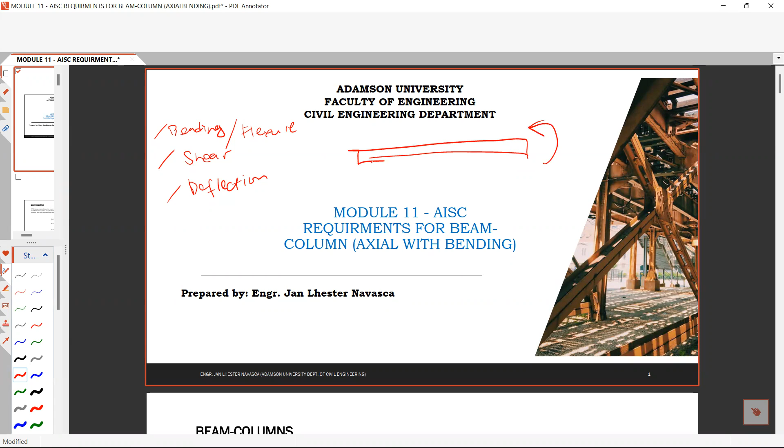Again, the steel beams are the horizontal members that are susceptible for bending, or basically pure bending lang siya. Ito yung steel beam natin, pure bending lang siya. Then under the bending and flexure, we have the three limit states: yielding, lateral torsional buckling, and flange local buckling.

And under shear, we are considering two different scenarios. Number one is when you don't have web stiffeners, or you have stiffeners but your A over H is greater than 3. Number two is when you have stiffeners or web stiffeners and your A over H is less than 3. So that is the shear requirement.

And under the deflection requirement, you have different criteria. Deflection requirement is under the elastic analysis - what is your deflection of your steel beams? You need to control your deflection to control the damage of non-structural components connected to your steel beams. Kung if you have a glass below your steel beams, if you have a large deflection, maybe that non-structural component, the glass cladding, will break. So this will be the criteria in designing your steel beam when you have pure bending like this one.

The question is, what if there is an existence of an axial load? So mainly for a column, we are anticipating a pure axial compression or a pure axial tension. And for beams, we are anticipating a pure bending - only bending. I call this one pure because very large yung difference between almost zero yung bending in a column and almost zero yung axial in the beams.

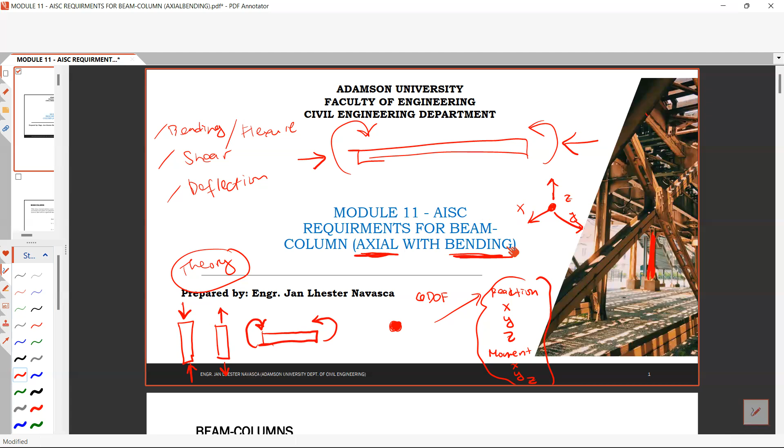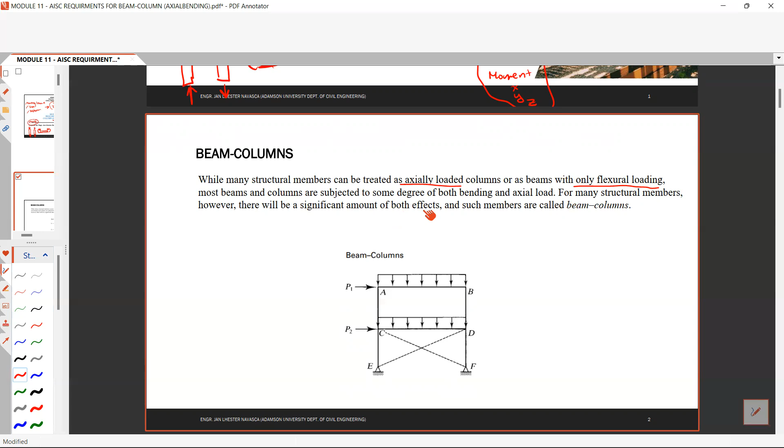So beams and columns are, let's say this one - while many structural members can be treated as axially loaded columns, that's like what I said, that our column is treated as axially loaded, only pure axial compression or pure axial tension, and beams only for pure bending, pure flexural loading. However, most beams and columns are subjected to some degree of both bending and axial load. So for many structural members, there will be a significant amount of both effects, and such members are called beam column, or the interaction of our axial with bending.

Okay, so another example kung bakit kayo magkakaroon ng axial with bending interaction is when you don't have a perfectly constructed building. Okay, don't have a perfectly constructed building.

So for example, based on the drawing, your reinforced concrete, let's say, have a distance of let's say 250, or let's say this one is 400. But in real life, ang nagawa is let's say 245 by 395.

Okay, so there is an error. So therefore, your column, let's say this one is your column, is not placed on the center of your column. So meron siyang eccentricity. What you call this one as an eccentricity. There is an eccentricity to the load and to the center of gravity of your section.

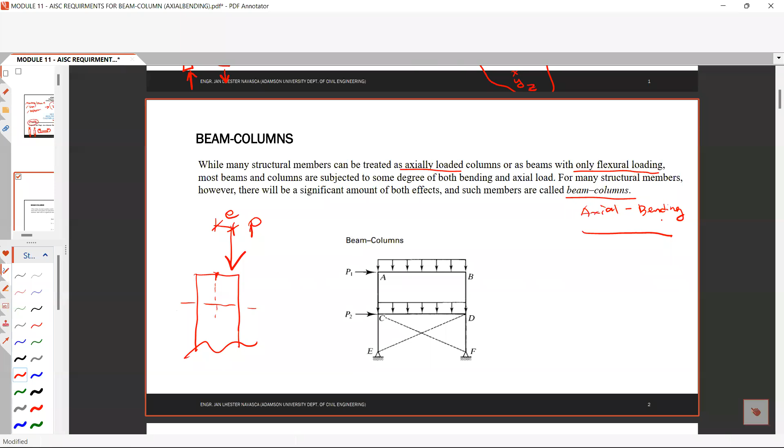Okay, so at this case, you have an axial with bending interaction. Okay, so there is a provisions in AISC how to deal with this kind of cases when you have an interaction of axial and bending, or what they call as beam columns.

So let us recall ano yung napag-aralan natin in the prelims and midterms when designing compression members, tension members, and steel beams. Okay, so let us recall that the required strength should be less than or equal to the available strength, or what we call this one as your demand load should be less than or equal to your required strength or your capacity.

Sorry, not required strength, the capacity. Okay, so your demand load shall be less than or equal to your capacity, or they call this one the required strength shall be less than or equal to the available strength. So in order to satisfy or to be safe in your steel members or your structural members.

So in tension members in LRFD, we are comparing the T sub U to phi sub T Tn, right? Whereas your phi sub T is the resistance factor in tension. And for ASD, you have T sub A less than or equal to T sub n divided by the factor of safety omega in tension. What you have this subscript T in tension.

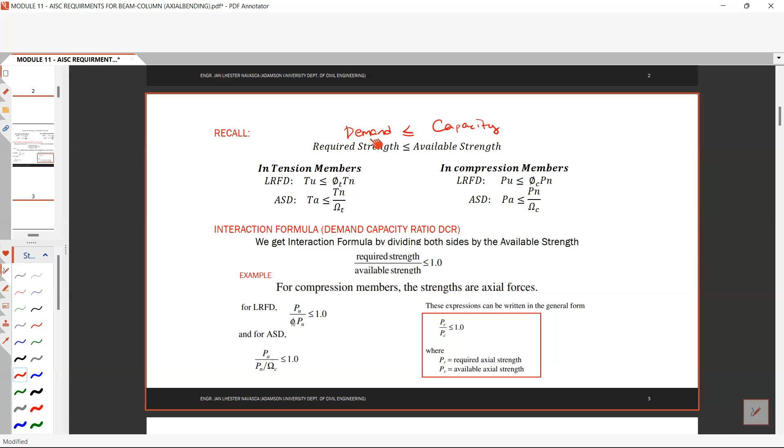So this is our working equation when we're dealing with how to check the adequacy of our steel members. Then the interaction equation or the demand capacity ratio, as you all know right now, what is the DCR, is basically the ratio of your demand to the capacity. So we get the interaction formula by dividing these both sides by the available strength.

So therefore, the required strength and the available strength, or we call this one as the demand capacity ratio, or demand divided by the capacity, shall be always less than 1.0, in order to satisfy

the adequacy or the safety of our steel members. Okay, so masasabi natin na safe yung ating members when our demand capacity ratio is less than 1.0, right?

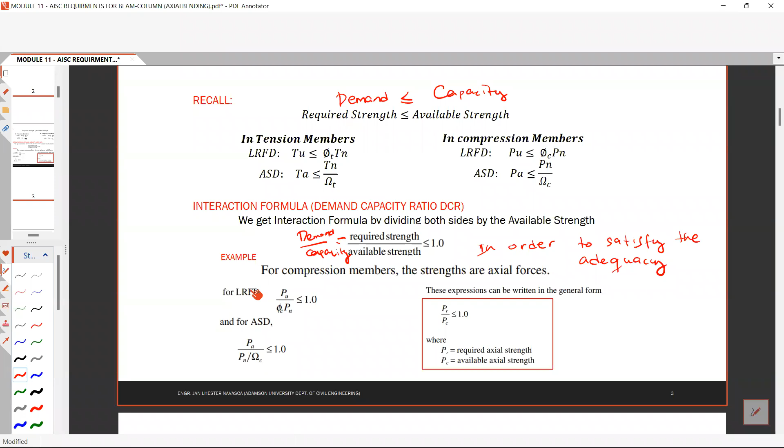So for example, in compression members, the strengths are based on axial forces in kips or in kilonewtons. So let's say in LRFD, your P sub U divided by phi sub C Pn shall be less than or equal to 1.0. And for ASD, this P sub A divided by Pn over omega C is less than or equal to 1.0. So basically, just divide this one and you have 1.0.

Okay, this expression can be written in the general form that P sub R over P sub C, where P sub R is the required axial strength and P sub C is the available axial strength. So basically the same as our demand capacity ratio. The only thing that changes is the subscript. The AISC uses R and C. R is for the required strength, and C is for the capacity or the available strength.

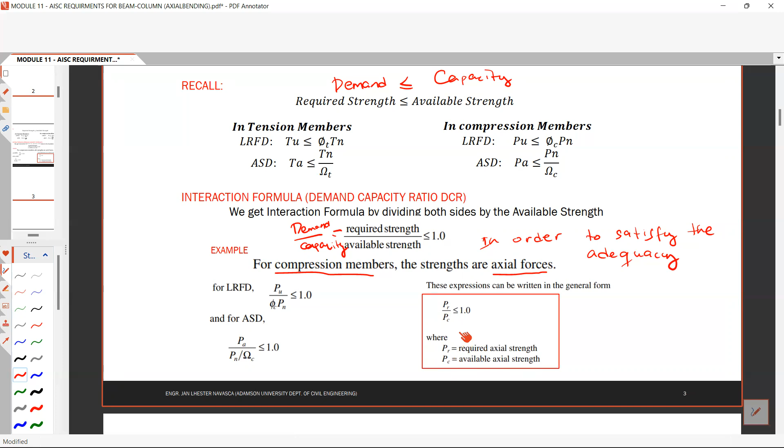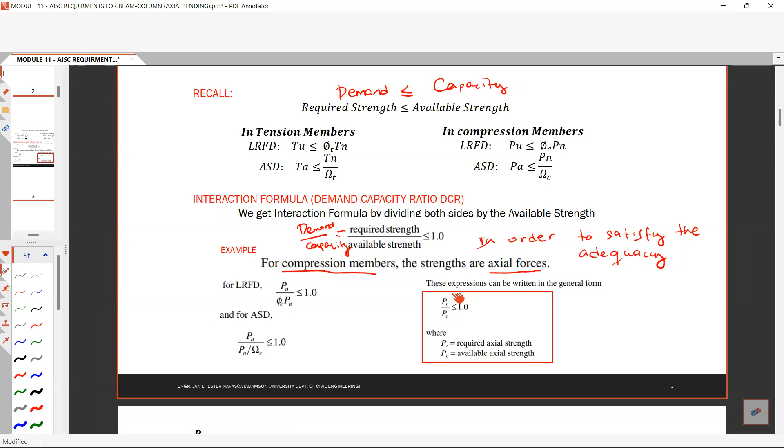Okay, so this one can be generalized to these equations: PR over PC, where P sub R is the required strength and PC is the available strength. Then we call this one as the interaction formula for compression.

Okay, now considering moment, what if considering moment, so just change P to M for moment, just MR over MC shall be less than or equal to 1.0. We call this one as the interaction formula for bending only. So this way is the interaction formula for compression and the interaction formula for bending. Okay, so now considering this combined axial and moment.

Considering this combined axial and moment, the sum of the interaction formula for bending and the interaction formula for compression shall always be less than or equal to 1.0 if you are considering this combined axial moment. We call this the interaction formula for axial with bending on a single axis only.

Now let us consider both axes. What if we have this section with bending in Y and bending in X? The interaction formula for both axis bending is PR over PC plus MR over MC on the x-axis plus MR over MC on the y-axis shall be less than or equal to 1.0. This is the interaction formula for axial with bending on both axes.

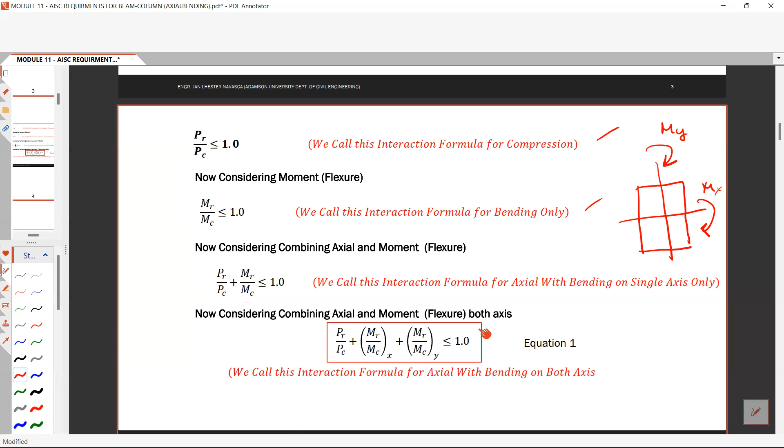So on STAAD, if you try to solve structural analysis of beams and structural analysis of our project, you can see that in the output of the structural analysis, at every joint you have three moments: MY, MX, and MZ. These three moments are the moments in both axes, and the other one is for torsion, along this grid.

Later on, when you are dealing with the structural analysis of the whole structure, you can see that you have this bending in both axes. This bending in both axes uses the interaction formula considering bending in both axes.

So PR over PC, plus MR over MC on the x-axis, plus MR over MC on the y-axis shall be less than or equal to 1.0. This will be our equation 1. This equation 1 is the basis of the AISC formulas, the interaction formula basis of the AISC.

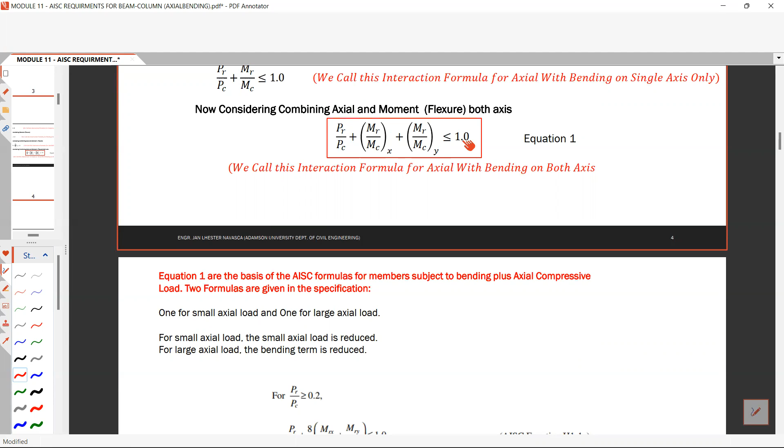They just modify this interaction formula considering different cases. Case number 1 is for small axial load, and case number 2 is for large axial load. For small axial load, the axial load term is reduced, as you can see. And for large axial load, the bending term is reduced. This is for large axial load, when axial is a compressive force. And this one is for small axial load.

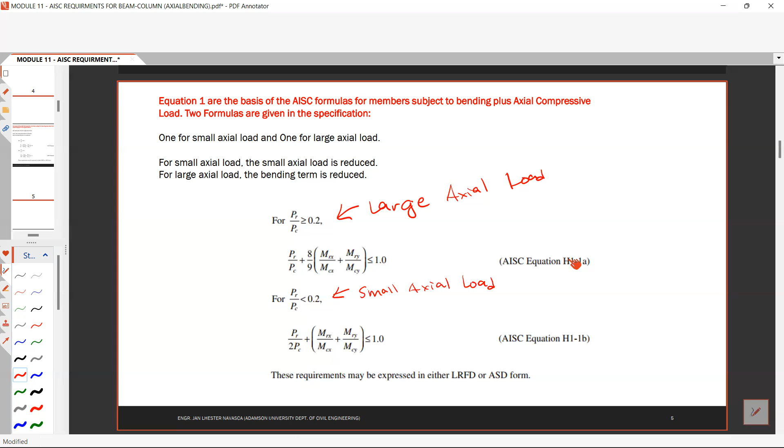If we compare this AISC equation to our basic interaction equation, the constant or coefficient of each term there is 1.0. This one is 1.0, this one is also 1.0. So the coefficients of each term is 1.0.

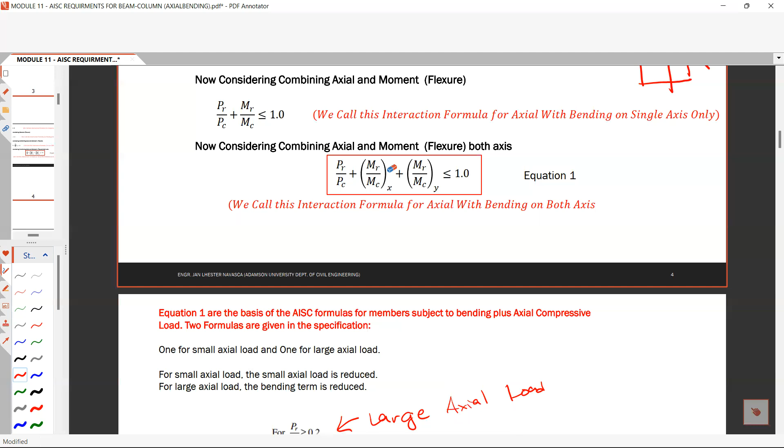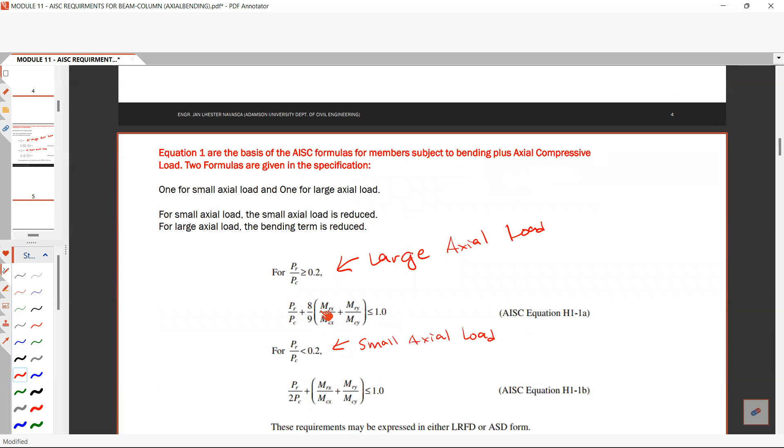But the AISC provides a factor or coefficient or constant that will modify the axial or bending term depending on the case. When you have a large axial load, the bending term is reduced, so as you can see, you have a factor of 8/9 applied to the bending in both axes. 8/9 is less than 1.0, equal to about 88.88%.

For large axial load, the bending term is reduced, and for small axial load, the axial load term is reduced by a modifier of 1/2. This one remains 1.0, just like this one remains 1.0, but this one has a factor of 8/9.

So this will be the AISC equation H1-1a for large axial load, meaning the interaction equation for axial that is greater than 0.2, or the DCR that is greater than 0.2. When your DCR, or PR over PC, is less than 0.2, you have this other equation. So you can tell if your beam is satisfying the strength requirement or not because of this AISC interaction equation.

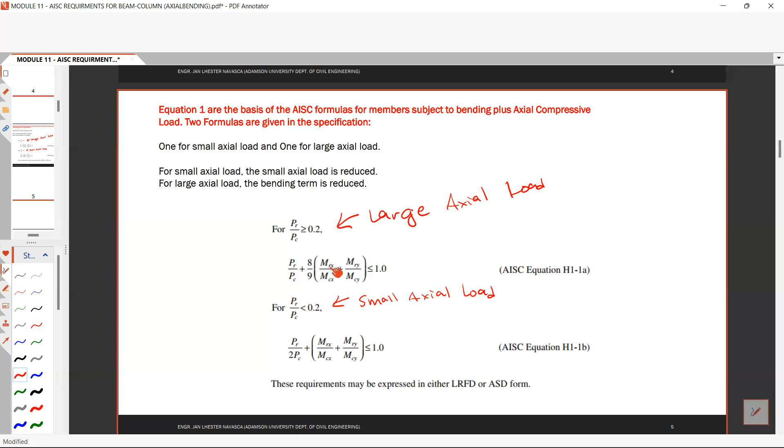This case is for doubly and singly symmetric members subjected to flexure and axial force. Doubly and singly symmetric meaning symmetric in shape about both axes. So doubly symmetric shapes are I-beams, and also hollow sections, meaning you have symmetry on the X axis and symmetry on the Y axis.

And for singly symmetric members, this is for C shapes, for WT or T shapes, and L shapes, just like this one. So this case is for doubly symmetric, and this is for singly symmetric cases.

So PR over PC greater than 0.2, you have this interaction equation. And for PR over PC that is less than 0.2, this is your interaction equation.

PR is the required axial strength determined in accordance with Chapter C using the LRFD or ASD load combination. This is the demand. All the numerators are from the demand, and all the denominators come from the capacity. Take note of this so you don't get confused.

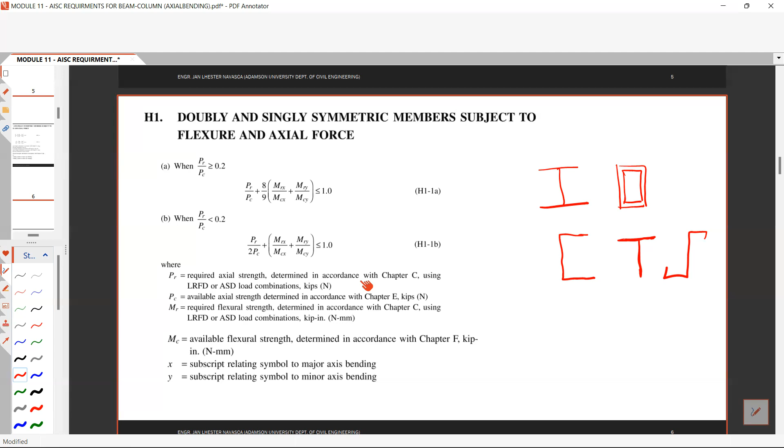So that is our interaction equation for doubly and singly symmetric members. If you are dealing with LRFD demand, you use LRFD capacity. If you're dealing with ASD demand or ASD load combination, you need to use the ASD design capacity.

So expanding the equation for LRFD and ASD: for LRFD, if PU over phi sub C PN is greater than 0.2, you use this equation. If PU over phi sub C PN is less than 0.2, you use this other equation. For ASD, you have this equation.

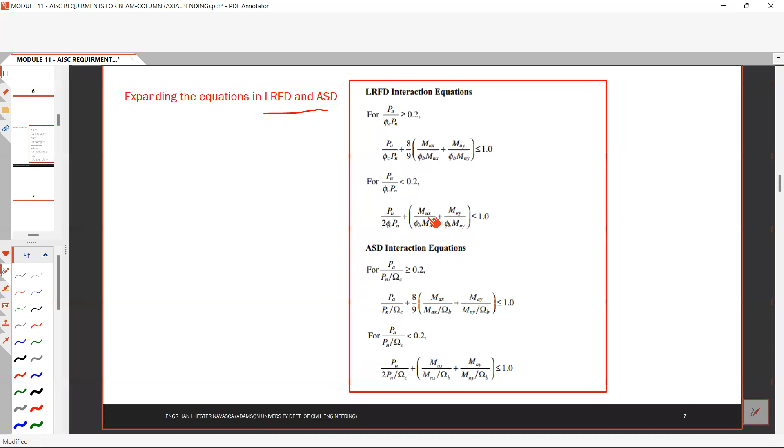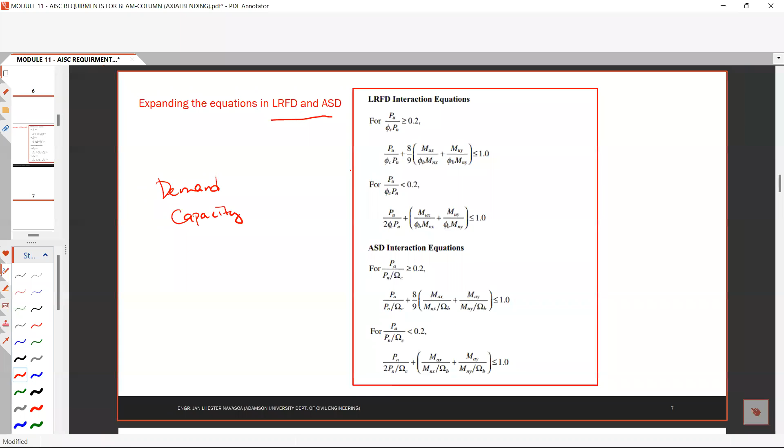Don't worry about this one. Just remember what is your demand and what is your capacity, and you're good to go with these interaction equations. So let's try to solve problems regarding these interaction equations of axial and bending.

Example problem 1: determine whether the given members satisfy the appropriate AISC interaction equation. Do not consider moment amplification. The loads are 50% dead load and 50% live load. Bending is about the x-axis and the steel is ASTM A992 with Fy equal to 50 KSI. Let's try using LRFD and using ASD.

Let us determine if this W12 by 106 satisfies the capacity when you have an existing axial compression and existing bending.

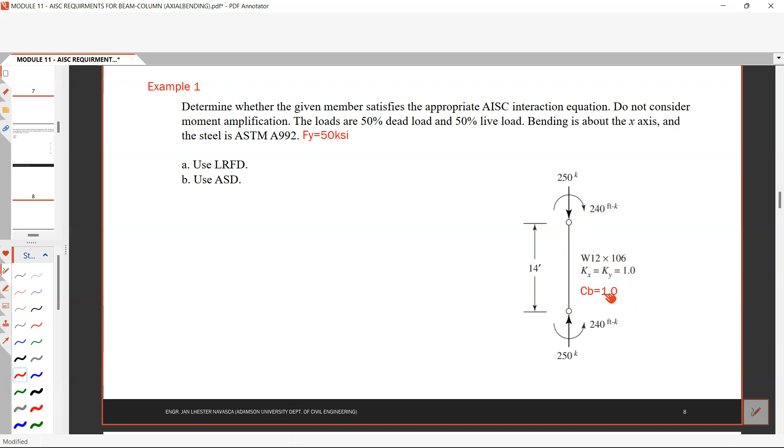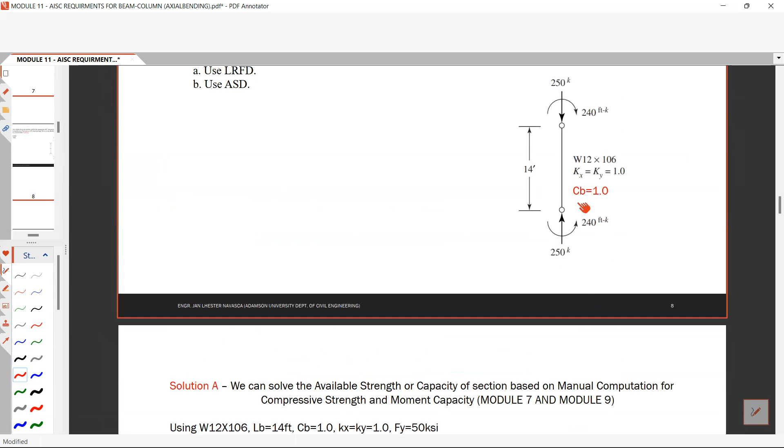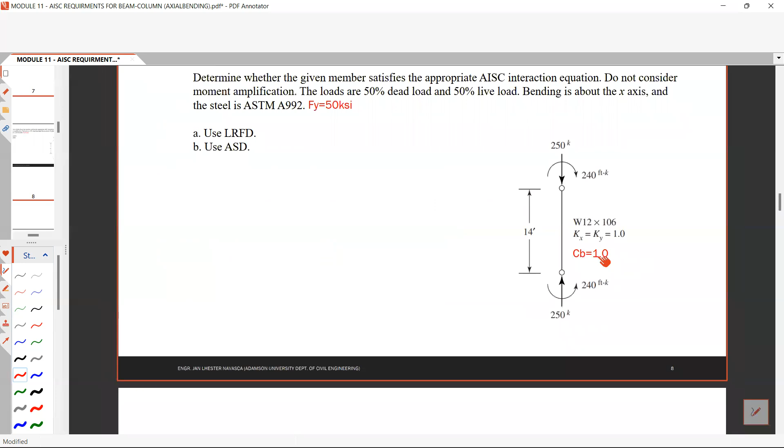For this problem we have two solutions. Solution A is to solve the available strength or capacity of the section based on manual computation for compressive strength and moment capacity - you can check Module 7 and Module 9. Module 7 is the AISC requirements for designing compression members or columns, and Module 9 is the AISC requirements for flexure of beams.

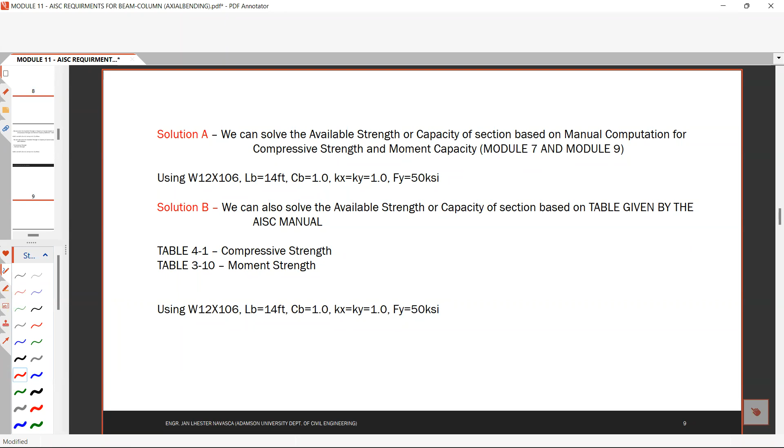So using W12 by 106, LB which is 14 feet, the total unbraced length is 14 feet, your Cb is 1.0, your Kx, Ky is 1.0, and your Fy is 50 KSI. Then we have Solution B: we can also solve this available strength or capacity based on the table given by the AISC manual. Table 4-1 is for compressive strength and Table 3-10 is for moment strength, using the same given parameters.

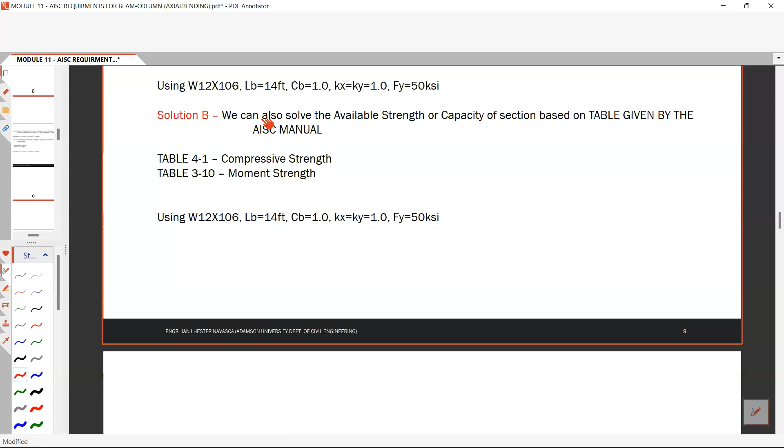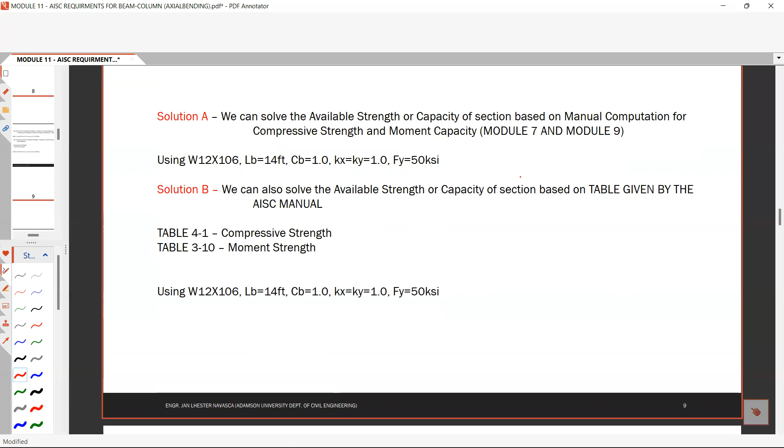Let's try to solve Solution B. For Solution A, you already know how to solve for the capacity based on Module 7 and Module 9 - check the slenderness for columns, and for the beams check the yielding, LTB, and FLB. That's Solution A. But for Solution B, which I'm showing now, you just need to check the table given by the AISC manual.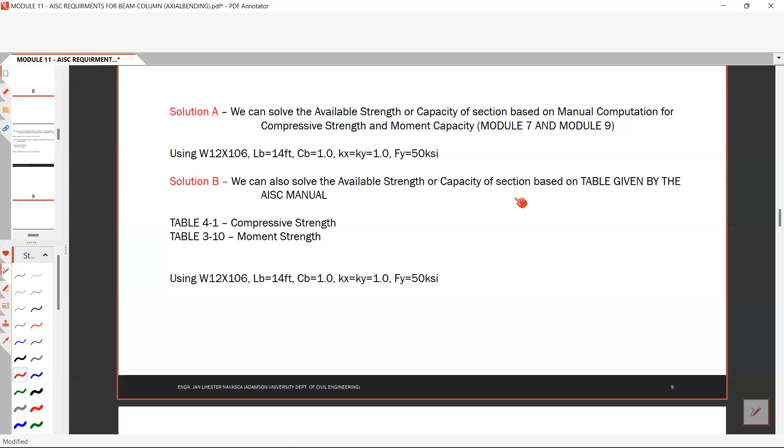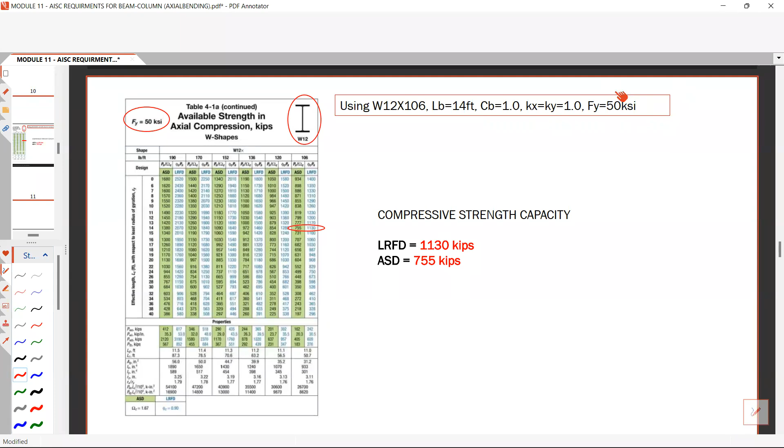Let us first solve the available strength and capacity using the W12 by 106 with Kx, Ky that is 1.0 and Fy that is 50 KSI. If you recall, I've already shown the class the table where you can see the capacity of your column - no need to solve.

Your unbraced length is 14 feet. Your effective length LE is equal to K times L, so that is 1.0 times 14, which is 14 feet. So you need to check the effective length of 14 feet. Check this W12, check this Fy 50 KSI.

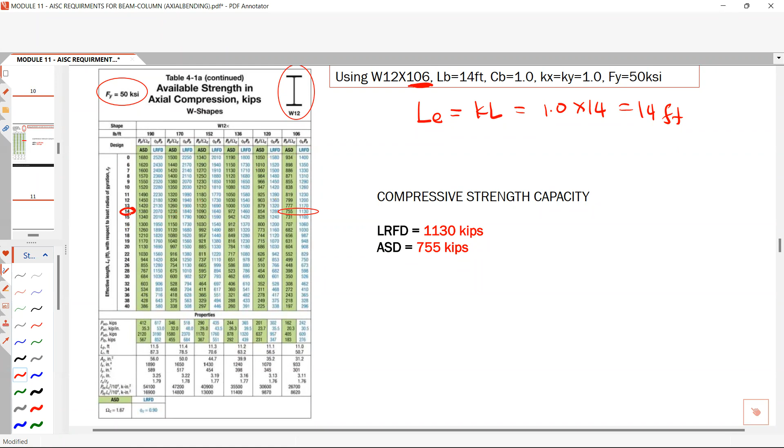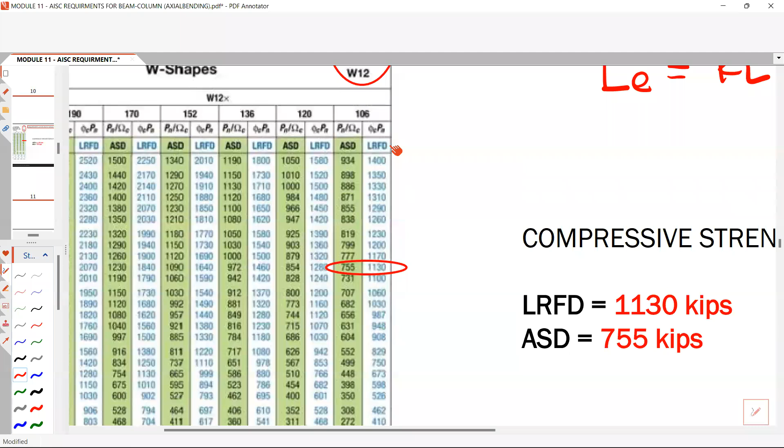Then check the unit weight of your steel section, that is 106 pounds per foot. So with 14 feet effective length and 106 pounds per foot, therefore you have this capacity. Zooming in, you have 755 kips capacity in ASD and 1130 kips capacity in LRFD. So this is the compressive strength capacity.

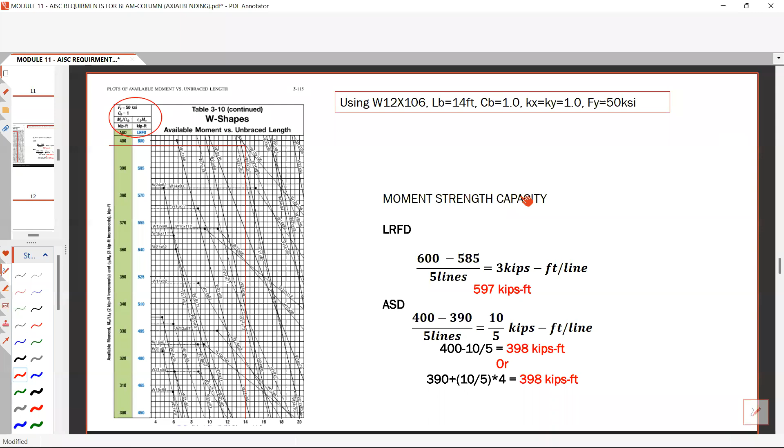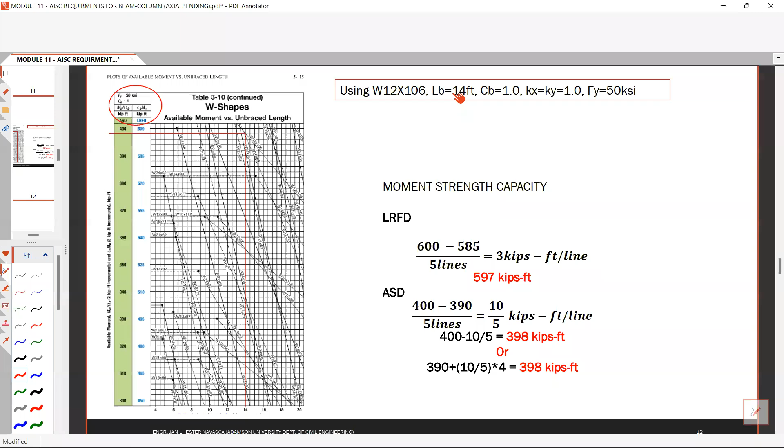Then solving for the moment strength capacity based on the table - no need to check that manually. You can use Solution B by utilizing this table. Again, using the same parameters: W12 by 106, LB that is 14 feet with Cb that is 1.0, and your Fy is 50 KSI. So let us check: Fy 50, Cb that is 1.

We need to find W12 by 106 in this graph. So where is our W12 by 106? Our W12 by 106 is given by this graph - if you can see, this one. This is the moment strength of W12 by 106.

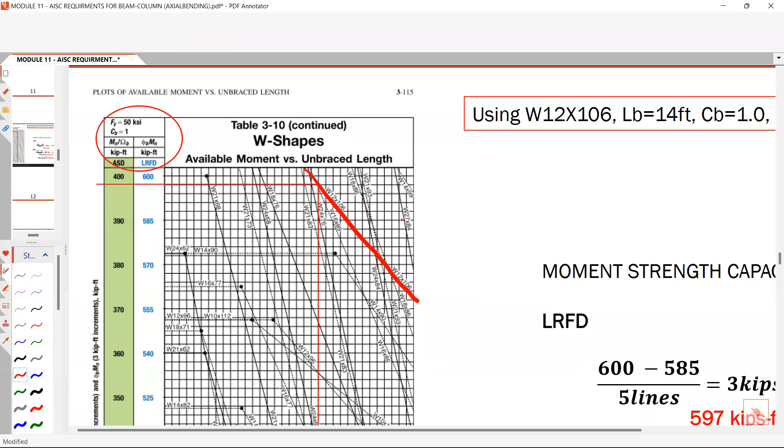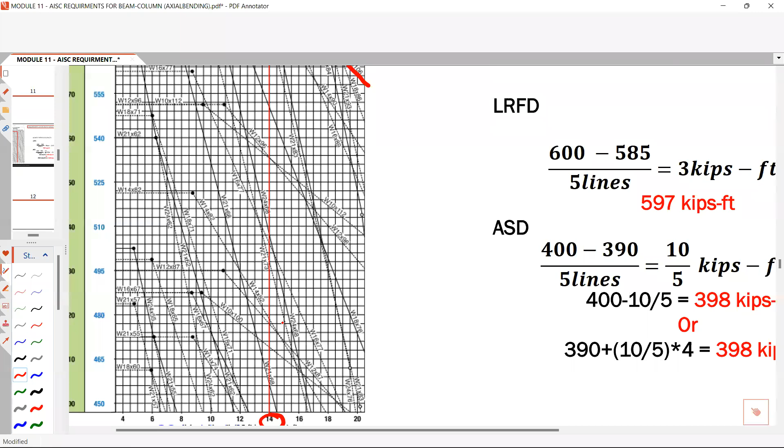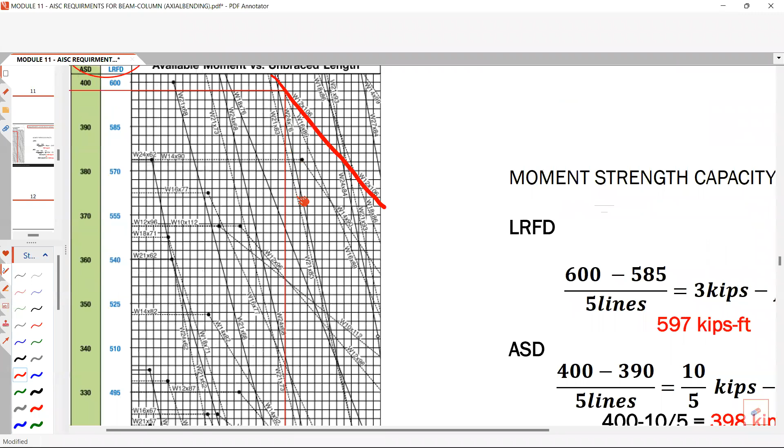So for the strength of W12 by 106, let us find our LB. Our LB is 14 feet, our unbraced length is 14 feet. Therefore we need to find the intersection of this 14 feet and this graph, projecting the vertical line for 14 feet unbraced length. The intersection of the unbraced length and this capacity graph is this one - it lands on this line.

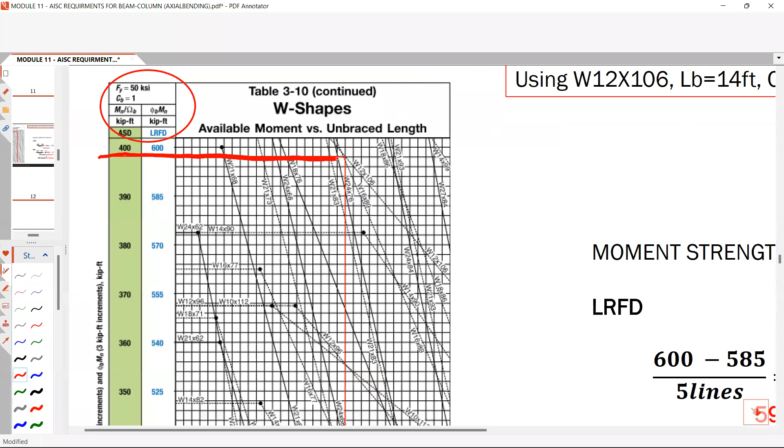Okay, so basically we just need to find the coordinates of this point in ASD and LRFD. So how do we solve for that?

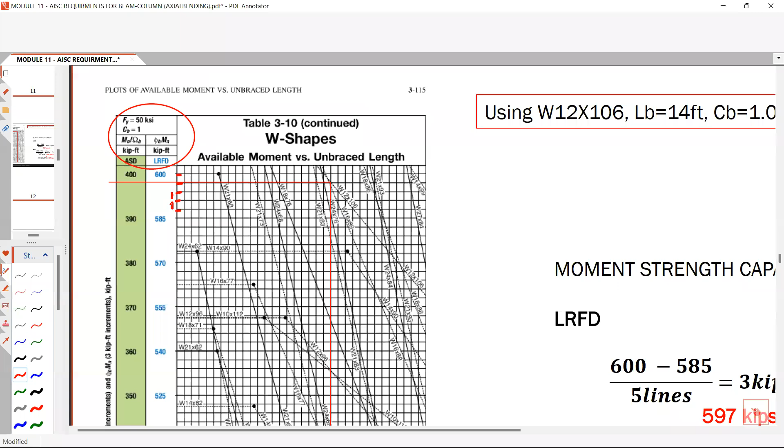For LRFD, just get the maximum and minimum of the given data and divide it by the number of lines. So how many lines between 600 to 585? We have 1, 2, 3, 4, 5, or 5 spaces. So meaning every line, you have 600 minus 585 divided by 5, that gives you 3 kips per line. So that is the scale or the unit per line.

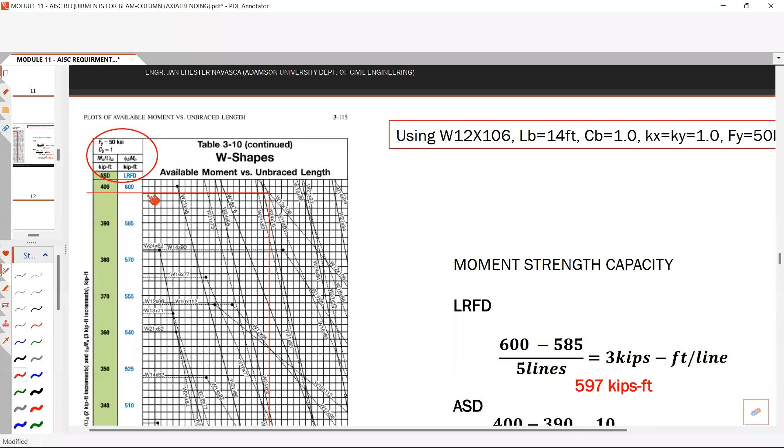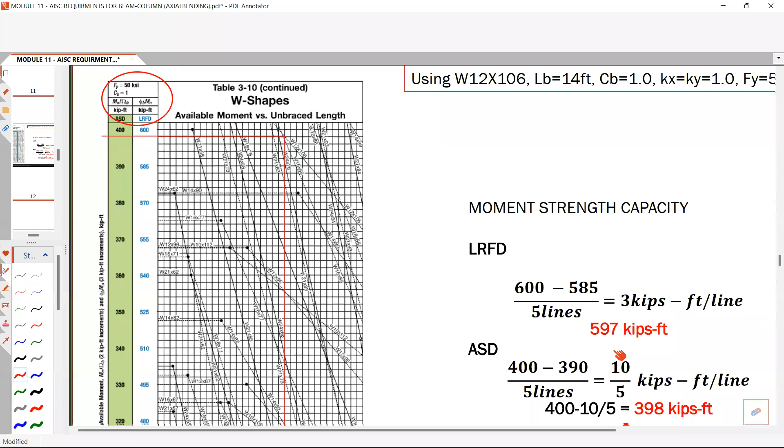And for ASD, 400 minus 390 divided by 5 lines, you have 10 over 5 kips per line.

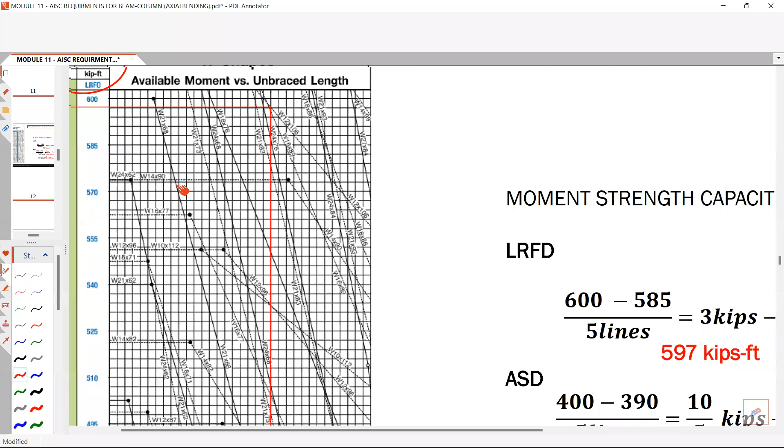Okay, so let us try this one. So how many lines? 585 plus 3 plus 3 plus 3 plus 3, or basically 600 minus 3. So therefore you have 597 kips feet.

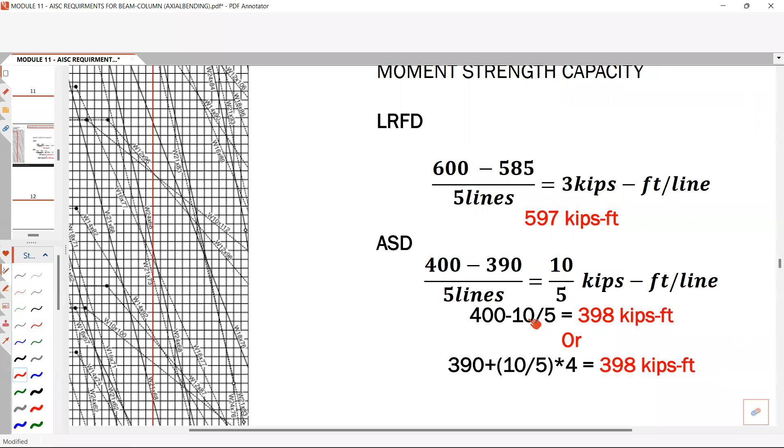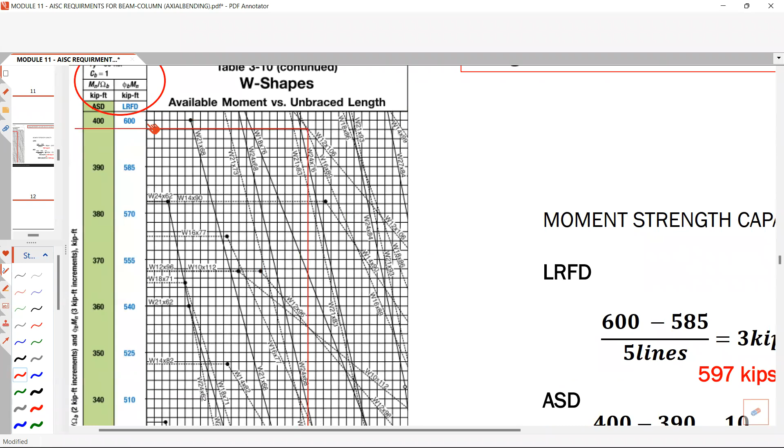Okay, then for ASD, how many lines? Maybe you can start from 390. So 390, 1, 2, 3, 4, that's 4 times 10 over 5. So 390 plus 4 times 10 over 5 gives you 398. Or maybe 400 minus 1 line, you have 1 line below, giving 398 kips feet.

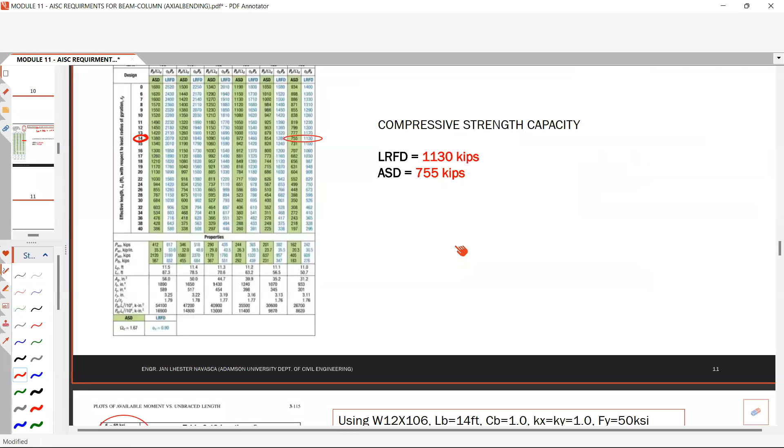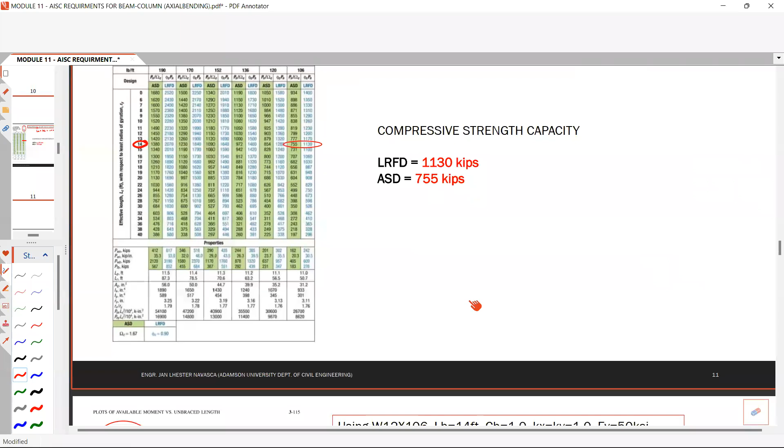So therefore, the compressive strength capacity in LRFD is 1130, and the moment strength capacity in LRFD is 597. And compressive strength capacity in ASD is 755, and the moment strength capacity in ASD is 398.

Okay, so let's get that one later. Let's just take it for now.

Then for the required strength and demand. According to the problem, we have 50% dead load and 50% live load. This is the total. So this 250 comes from 50% dead load and 50% live load, meaning this 250 kips force comes from 125 kips dead load and 125 kips live load. And this 240 moment comes from 120 dead load and 120 live load.

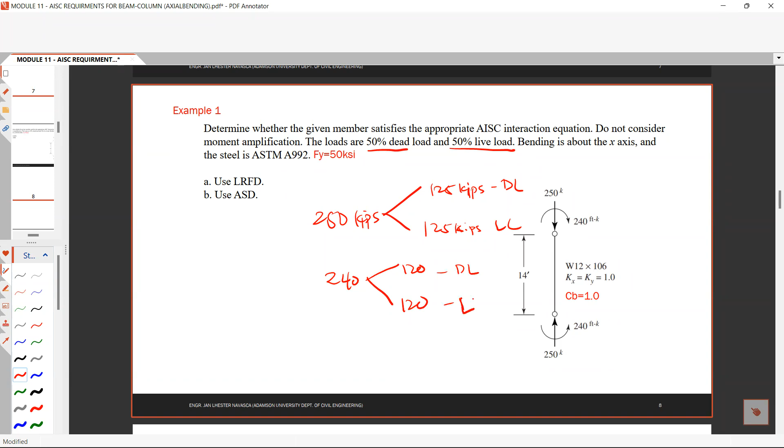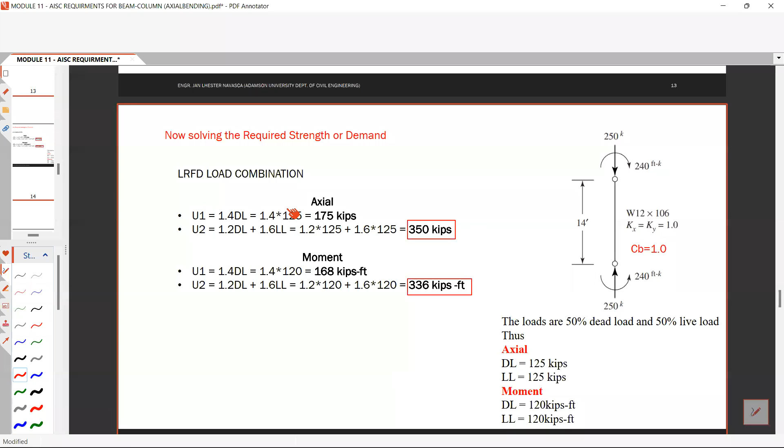Using the LRFD load combinations, you need to check U1 or U2 since you only have dead load and live load. For dead load, 1.4 dead load gives you 175 kips, or 1.4 times 125. Then for U2, 1.2 times dead load plus 1.6 times live load gives you 350 kips. So comparing U1 and U2, the required strength in axial under LRFD is 350 kips.

Then for moment, the two load combinations are 1.4 dead load, and 1.2, 1.6 live load. Using dead load 120 and live load 120, you get 1.2 times 120 plus 1.6 times 120, which is 336 kips feet. So this 336 kips feet is the required strength or demand moment under LRFD.

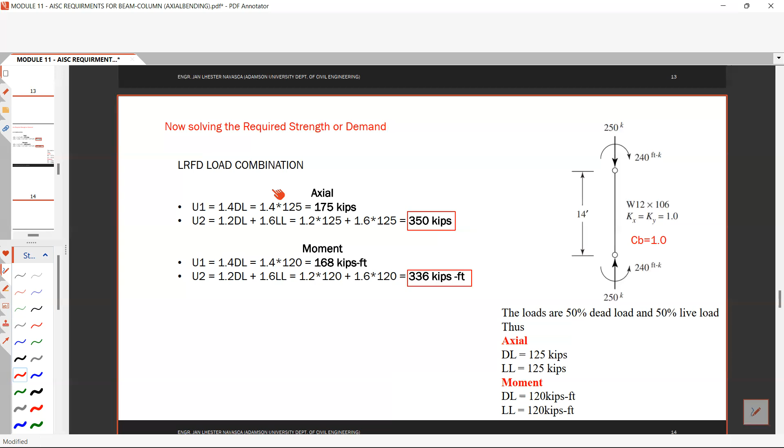Okay, so for ASD, you just basically use dead load plus live load only. Dead load plus live load is 250 kips. Dead load plus live load is 240 kips feet. So 250 kips is the required strength or demand load on ASD in axial, and 240 feet kips is the demand load for moment in ASD.

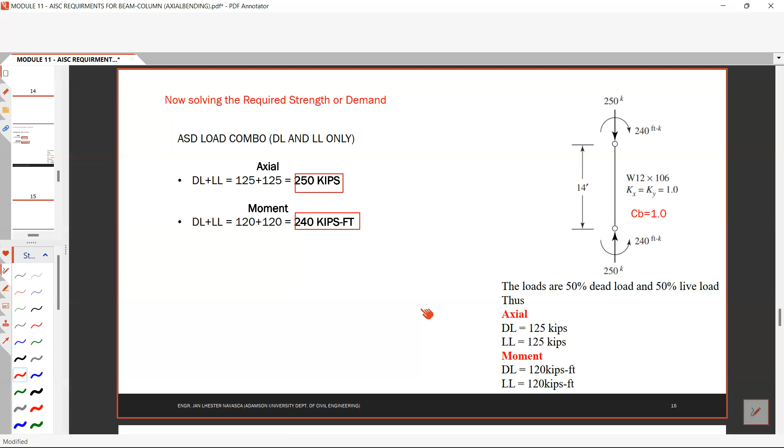Okay, so summary of the required strength and the available strength. So required strength, or the demand, under compressive strength, for axial, we have 350 kips in LRFD and 250 kips in ASD. And the moment strength required for bending, we have 336 kips in LRFD and 240 kips in ASD.

And for the available strength, we have the capacity. So for the capacity in axial, 1130 kips and 755 kips, and the moment strength capacity in bending is 597 and 396.67. Okay, so this is for the capacity, this is for the demand.

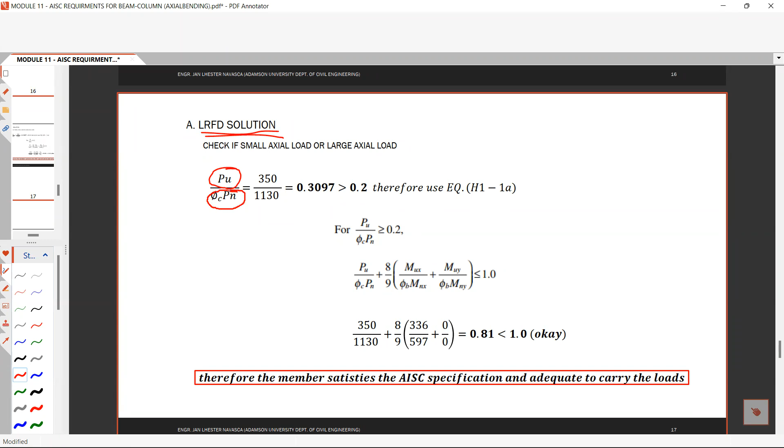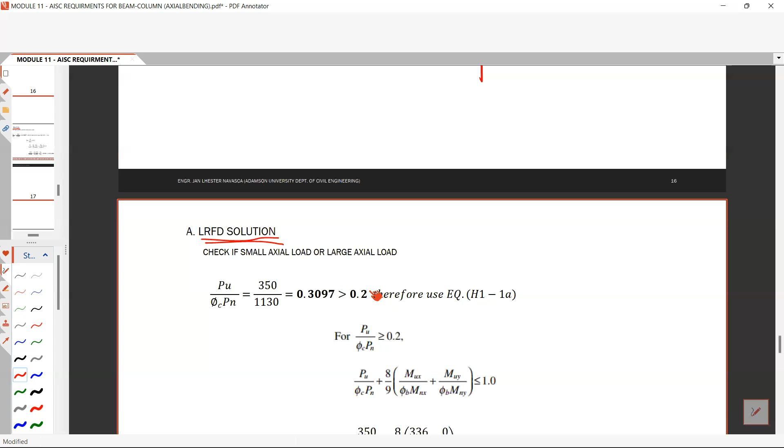So for the LRFD solution, Pu over phi sub c Pn, let us check if this is large axial load or small axial load. So 350, we're using LRFD, right? LRFD, so demand in LRFD in compression over capacity in LRFD in compression. So that is why you have 350 versus 1130. So 350 divided by 1130 gives you 0.3097, which is greater than 0.2. Therefore, you will use the interaction equation H1-1a, or this equation.

So therefore, you have a very large axial load. So therefore, your equation is this one: Pu over phi sub c Pn plus 8 over 9, this moment interaction.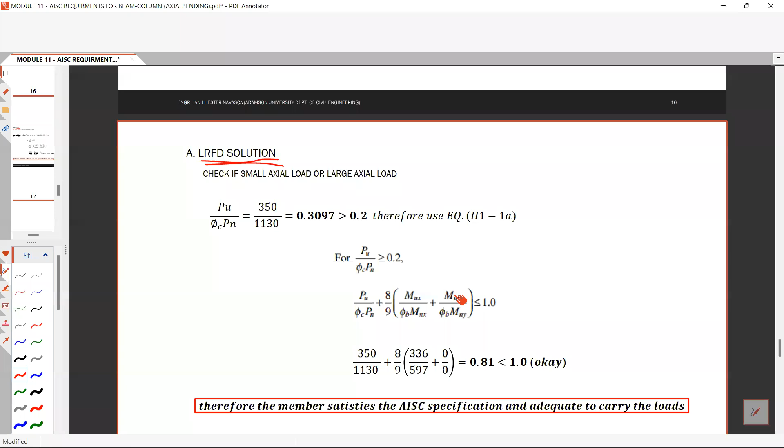350 over 1130. So what is the demand moment in LRFD? The demand moment LRFD is 336. What is the capacity moment in LRFD? Capacity moment LRFD is 597.

You have 597, and according to the problem, this is only for bending on the x-axis. So therefore, in your y-axis, you have 0 over 0. So if you try to solve for this equation, that is 0.81, which is still less than 1.0.

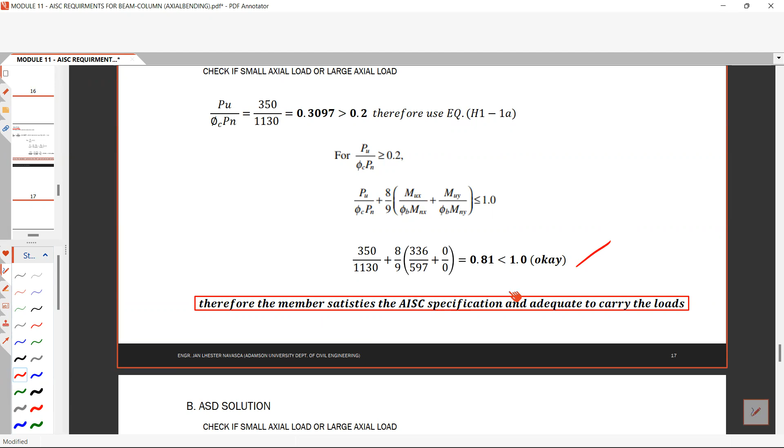Therefore, your column is okay. Therefore, the members satisfy the AISC specifications and are adequate to carry the loads.

Then for the ASD solution, let us check if it is a small axial load or a large axial load. So P sub A divided by P sub N over omega C.

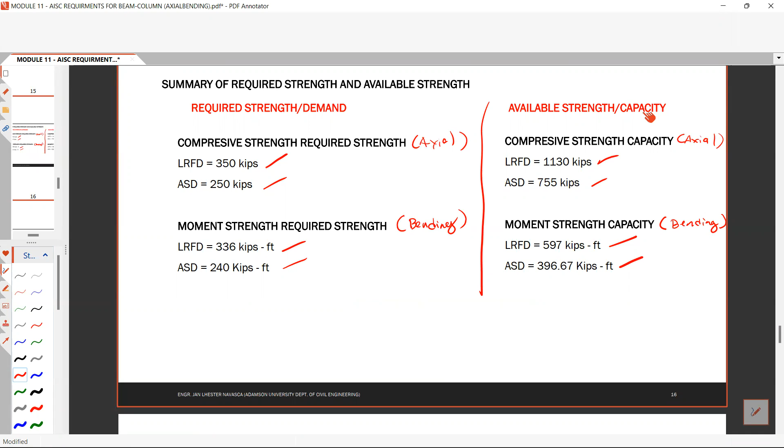Where did 250 and 755 come from? That is for the demand load in compression in ASD, that is 250, then divided by the capacity in compression under ASD, that is 755. Therefore, 250 divided by 755 is 0.3311.

That is greater than 0.2, so we will also use H1-1A. For this one, P A over Pn over omega C plus 8 over 9, the moment interaction shall be less than or equal to 1.0.

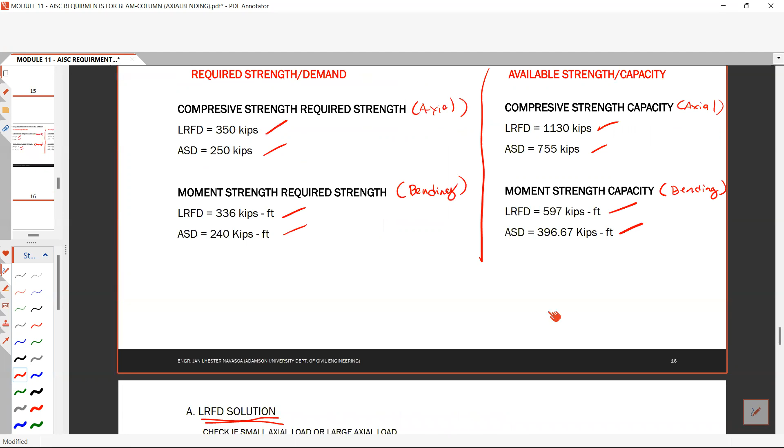Still the same. So 250 divided by 755 plus 8 over 9 multiplied by what is the required bending moment in ASD, the demand moment in ASD, that is 240.

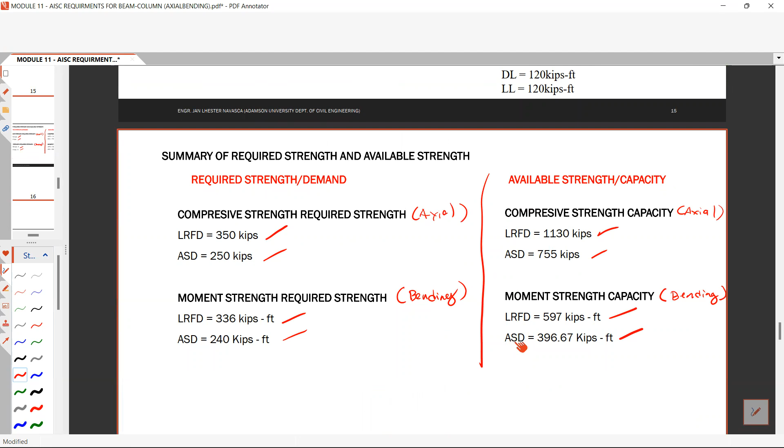This one is the capacity moment in ASD, so capacity moment ASD is 396.67. Again, the problem is only on the x-axis.

So therefore your y-axis is 0 over 0. If you evaluate this equation, you have 0.87, and it is still less than 1.0. Therefore, the member satisfies the AISC specification and is adequate to carry the loads.

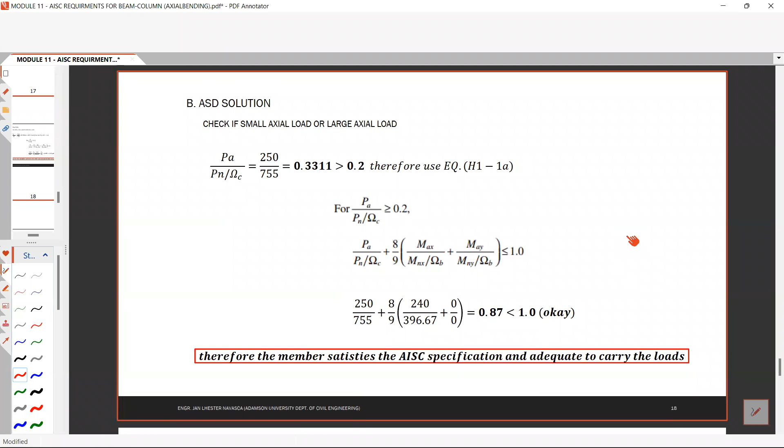So don't be confused by the equations. Basically just use this summary: tabulate the demand in compression and the demand in moment.

Write LRFD and ASD. Then on the side, tabulate the capacity in compression under LRFD and ASD, and the capacity in bending moment under LRFD and ASD.

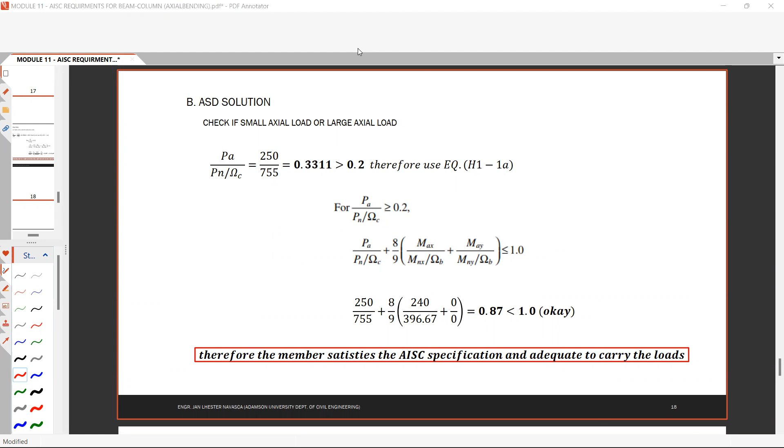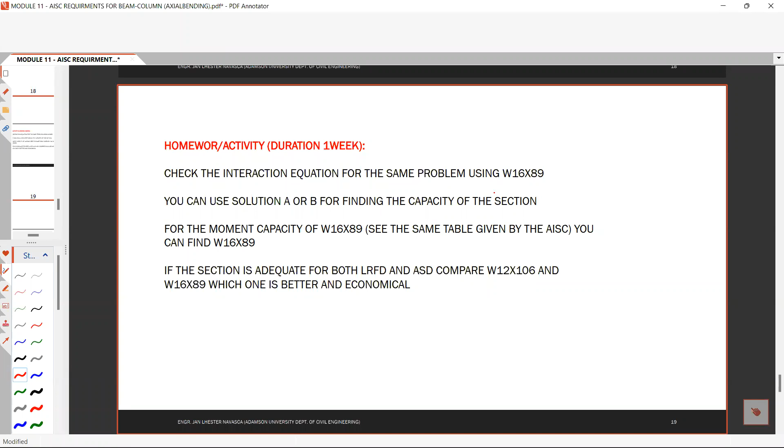Okay, for this one, for your homework, this is the first homework in midterms: check the interaction equation for the same problem using W16 by 89. Change the section to W16 by 89. So this is W12 by 106 versus W16 by 89.

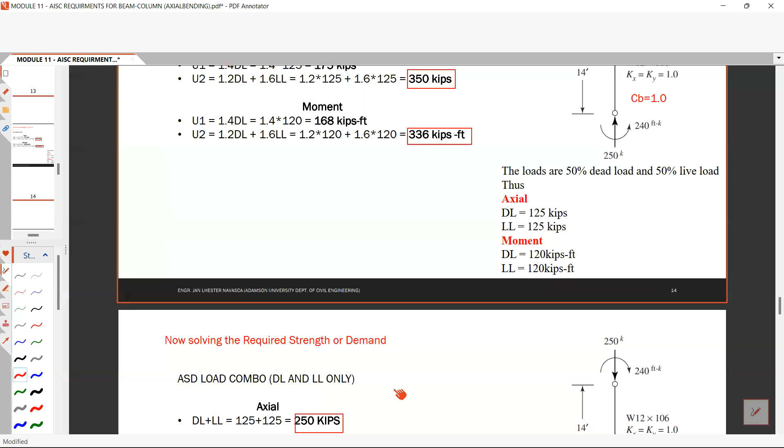You can use solution A or solution B. Solution B is what I've given using this table.

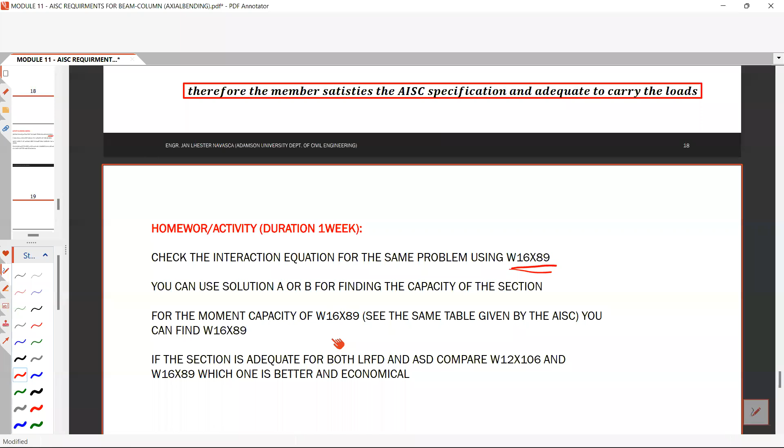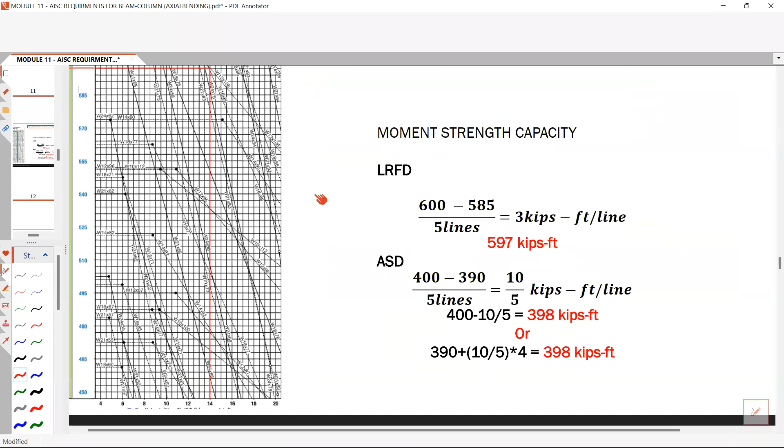For the moment capacity of W16 by 89, you can see the same table given by the AISC. You can find W16 by 89 for the moments, and you can check its capacity using this graph. It's right here, this one, W16 by 89.

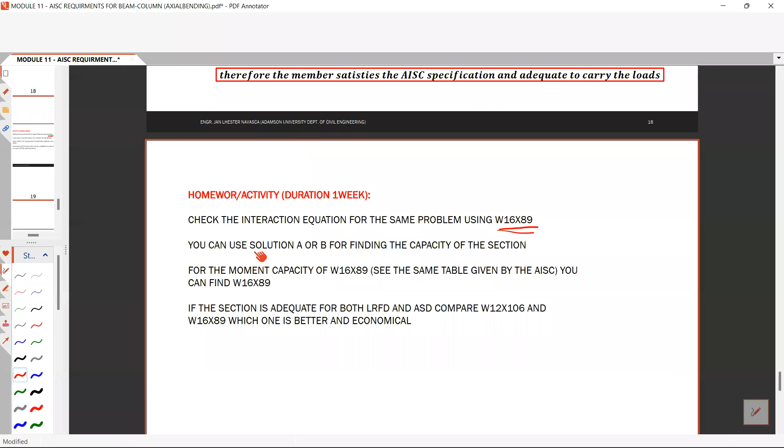However, you can still use solution A if you want. Solution A is basically using a manual computation of the capacity. For the actual capacity of W16 by 89, you can use a table or a manual computation.

So if the section is adequate for both LRFD and ASD, compare your W12 by 106 and W16 by 89. If both sections are adequate, which one is more economical? Please make a conclusion on which one is better economically once you've checked that it's adequate for both LRFD and ASD.

Do you have a question for the activity, for the homework? Any more for the class? None? Okay, so the duration of this is 1 week.